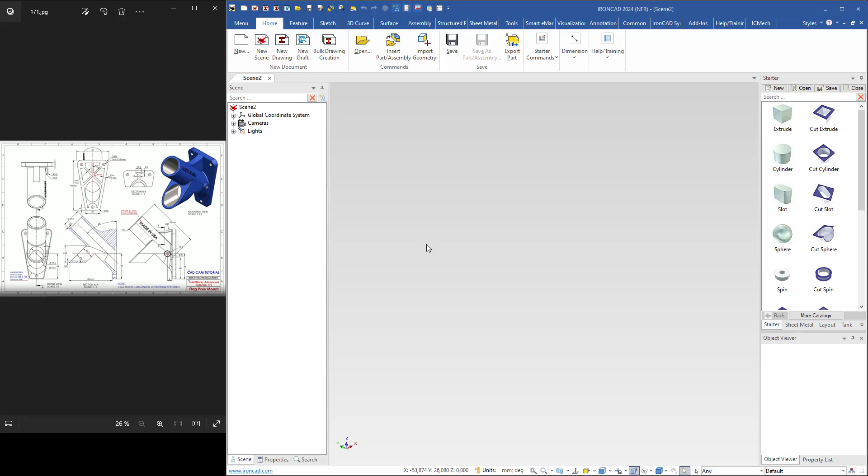In this video I'm going to create this flagpole mount. It looks like this, a drawing from a CAD/CAM tutorial. And I will begin with this backplate.

The size is 60, 95 and 27, and the thickness is 8. So I will begin to drag an extrude shape and drop it here in the scene.

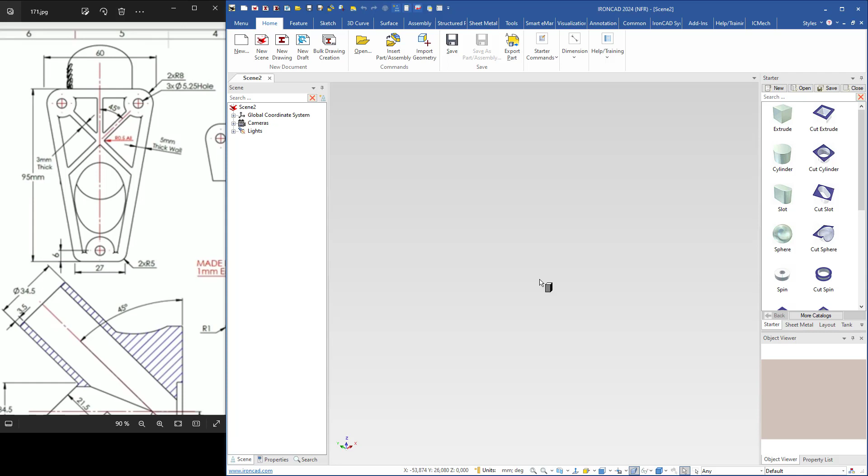Then I go to IntelliShape level and right click, go to Edit Cross Section. Usually it's display all, but I will go to hide all. Then I use the W key to activate the look at command. You have it down here as well.

I click here, then I select this line. Then I double click this dimension. Here I type 95 and hit enter.

Then I drag this line to the Y axis, so it will be positioned in the center.

Then I select that line and double click this dimension and uncheck maintain end conditions. Here I type 27 divided by 2.

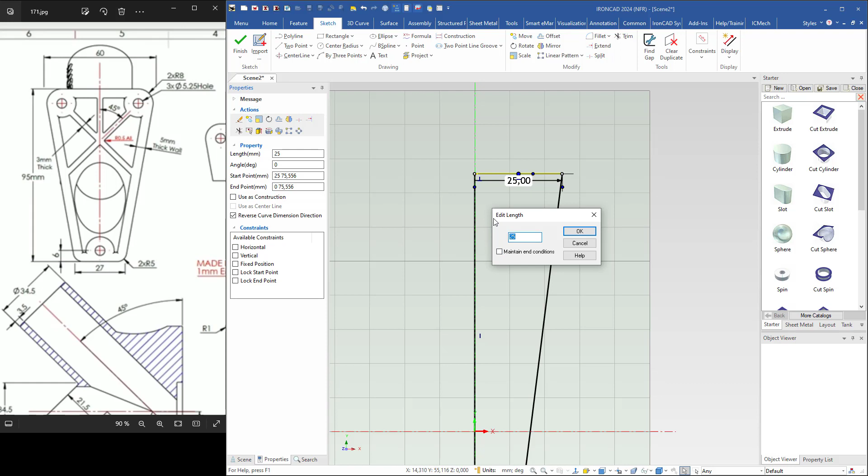Then I come up here, select that line, double click the dimension, uncheck that. That box here will be 30, like so, and then I select that line and delete it.

Select all lines, then I choose mirror, select the Y axis and click OK. Then I click finish up here.

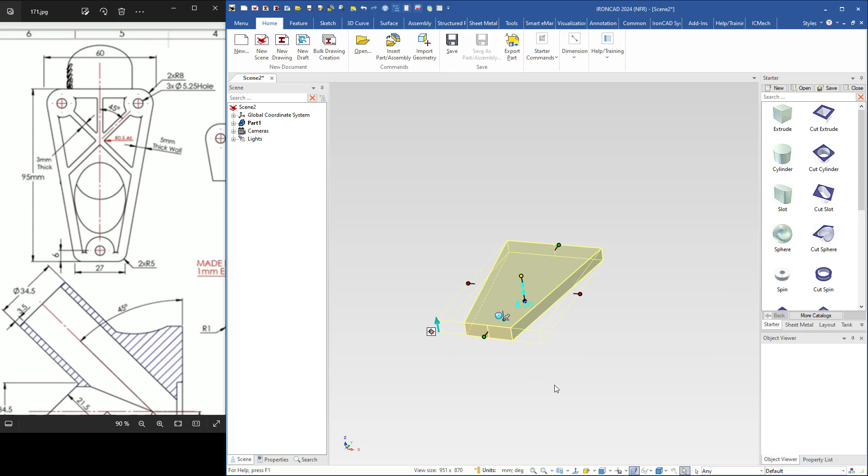And the thickness of this one is 8. Then I select it in part level, turn on the triball to rotate it in this direction 90 degrees.

And then I will blend these edges. The radius is 8 up here and 5 down here.

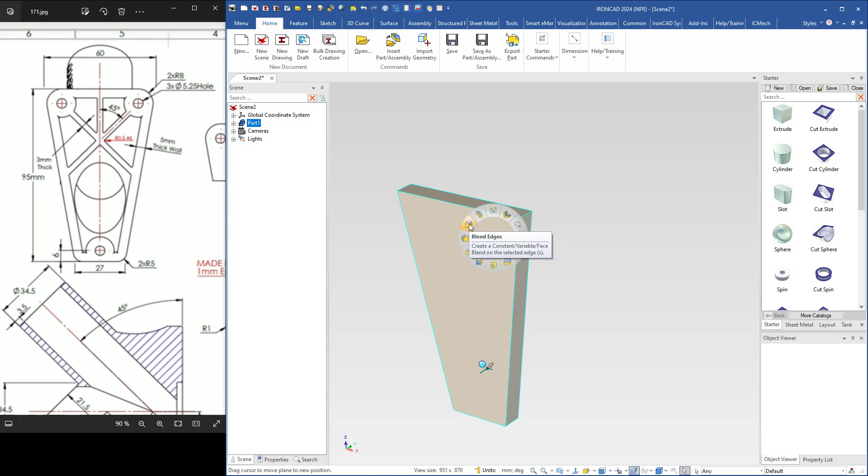So I press the S key on the keyboard and select blend edges. Select that edge, here I type 8, hit enter, do the same there.

And here I select that edge, and here I type 5 and hit enter, and do the same on this edge here. Let's see now, like so, and hit enter.

Then I will cut some holes. These 3, the diameter is 5.25, and I will grab...

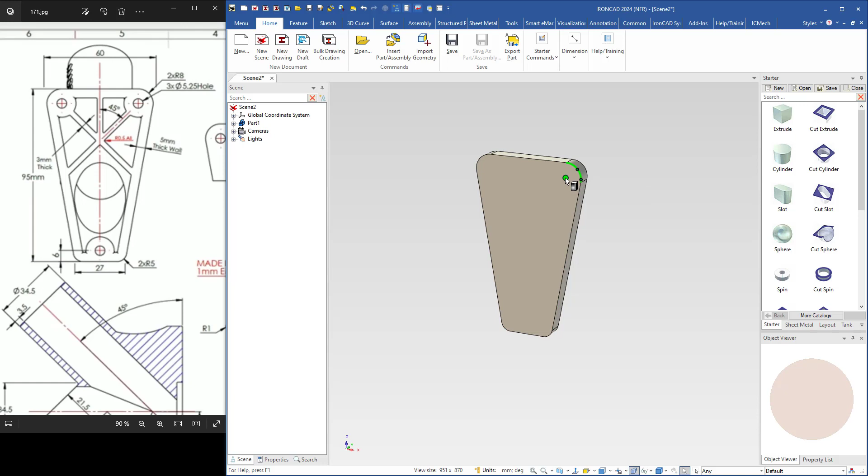...a cut cylinder, drop it here on the center point, change the diameter to 5.25, and then I grab this handle and snap it to the bottom, turn on the triball, then I right click...

...and drag the center handle, use the shift key to snap to this arc here so that the hole and the triball will be positioned on the center point of the arc, and drop it there.

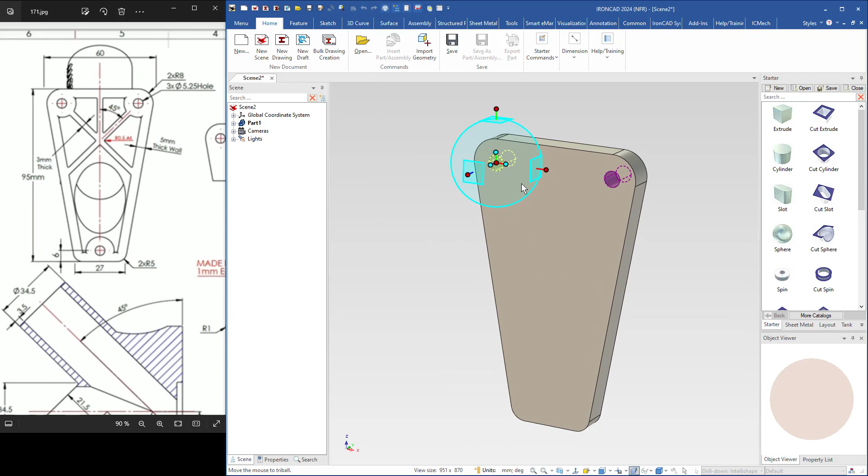Click link, and reset triball is also checked, because when I click OK, the triball will be positioned in the center of that copy. Then I right click and drag, and I will drop the hole here on the midpoint.

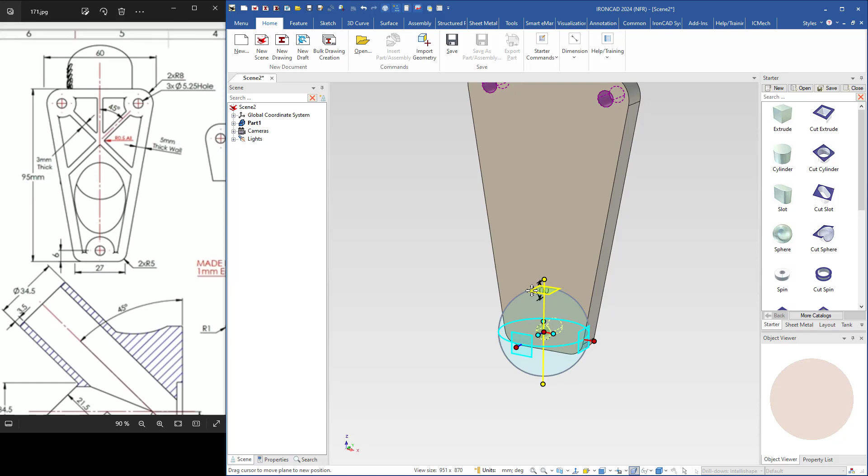Click link, and I will move the hole up 6 millimeters, like so, and then turn off the triball.

The next step will be to use shell feature on this side. So I will go to feature. You'll find it here as well, but for me with this small window it's easier to go to feature.

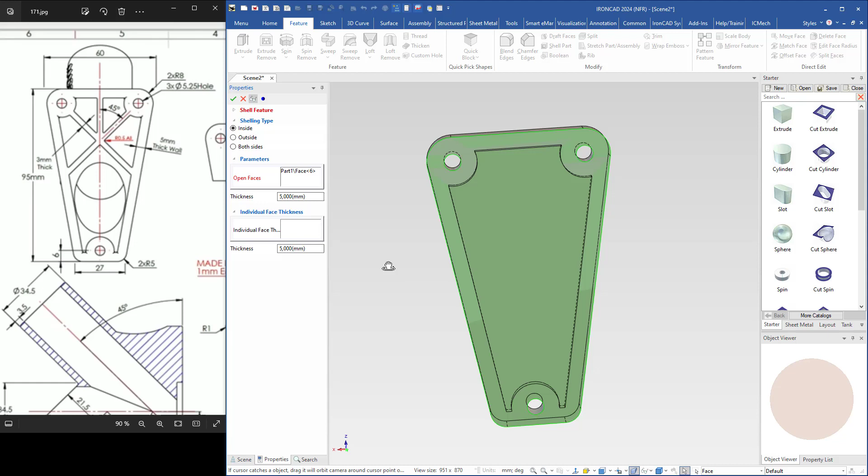So I will select shell part, select this face, and the wall thickness is 5 millimeters. We have it here, and I can also click the preview button to see how it will look like, and I'm satisfied, so I click OK.

Then we need some ribs here, and I will use the rib feature to do that. But first I have to add a sketch to tell the feature where to put the ribs.

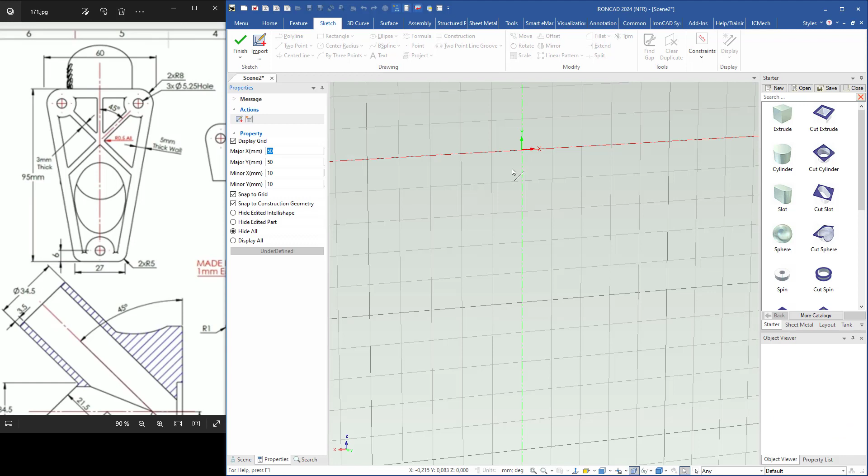So I use the sketch command here, a 2D shape, and I click here on the midpoint, then display all. Then I right click, choose 2-point line, and I will click here on the center point and drag a line like so. Do the same on this side.

And then I press escape. I will draw only 2 lines, because if I draw a line for that rib here, that rib will go through the whole part. So I begin with creating 2 ribs.

But first I have to change the angle of this line. So I click here on this side of the midpoint, double click the dimension, minus 135.

Click on this line, or this line here. That will be minus 45. Then I click finish. Now I can use the rib feature up here.

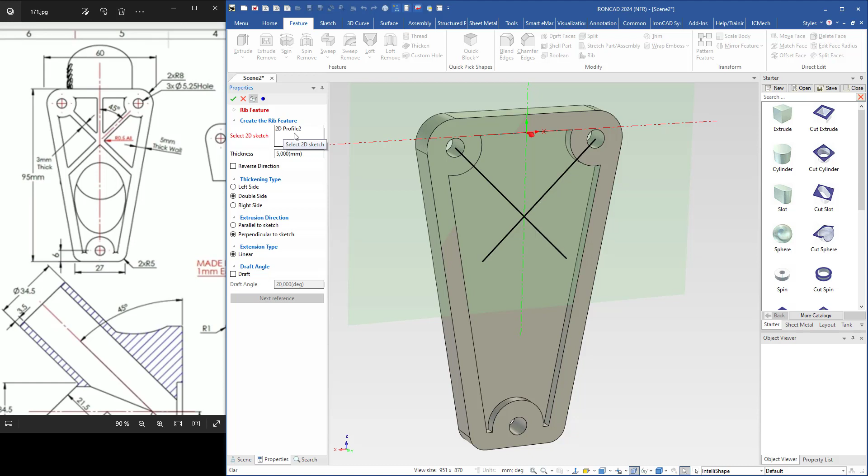Select the part, and the profile is already selected, but we see that this red arrow is pointing in this direction, so I have to check reverse direction.

And the thickness of the ribs are 3 millimeters, so I change that here. Then click OK, like so.

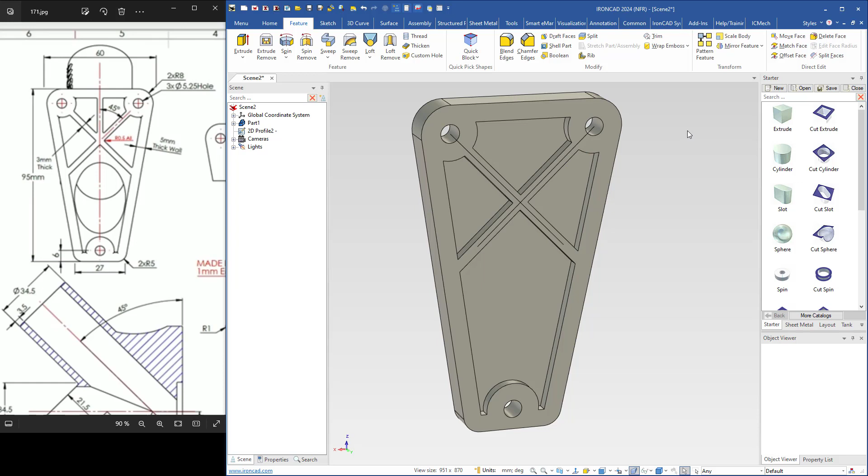Now I will create this rib. I will use an extrude shape to do that, so I drag an extrude shape, drop it here on the center point or midpoint. Then I right click and push this handle to change in both directions.

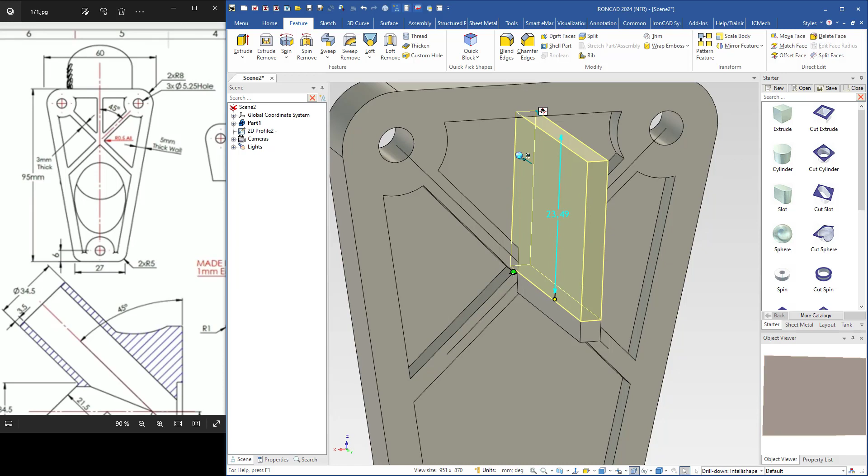Drop it there, type 3 and hit enter. Then I grab this handle, snap it to this edge, and I grab this handle to snap to this intersection here. And then the height handle and snap it to this side. So now we have the ribs in place.

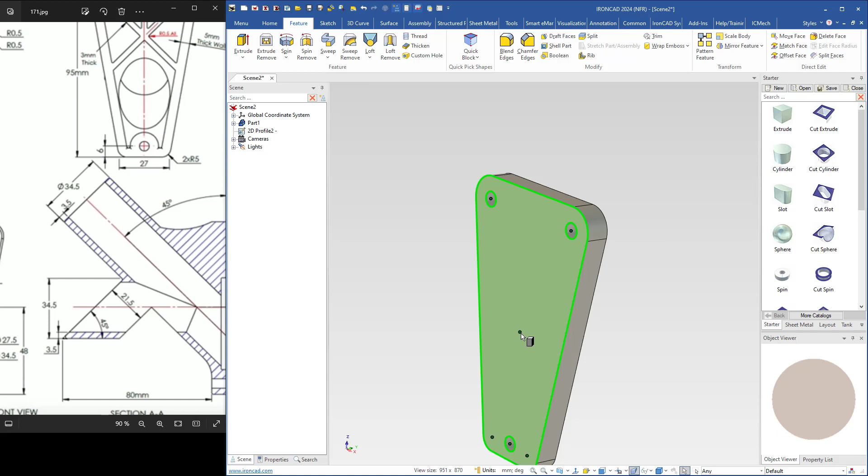Next step is to add this cylinder. The length of the cylinder is 95 and the diameter is 34.5. So I will drag the cylinder, drop it here on this point, change the diameter to 34.5, the length to 95,

and the height, or the center of that cylinder, is 40 millimeters from the bottom. So I will use the tri-ball. Let's see now. I will do like this. Turn on the tri-ball, right click, and edit distance from point, the bottom, that's 40, and hit enter.

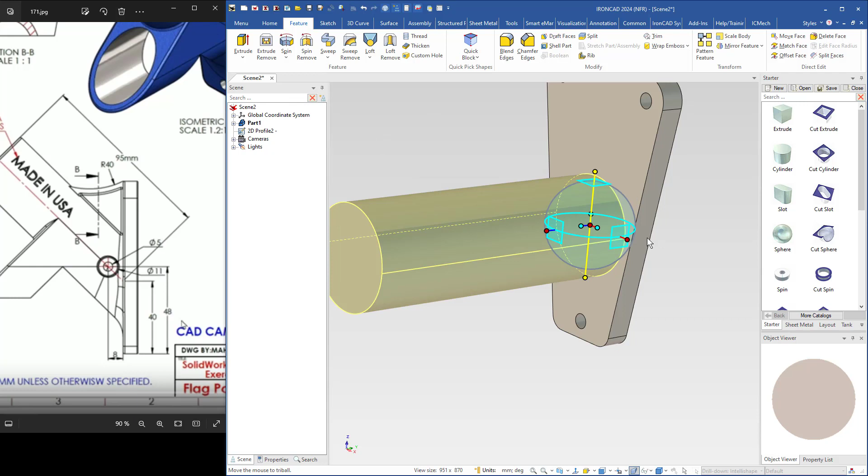Now I can rotate it 45 degrees, like so, 45. And then this side should be attached to the back plate. I will remove the tri-ball. And to do that I will grab this handle and move it up a bit.

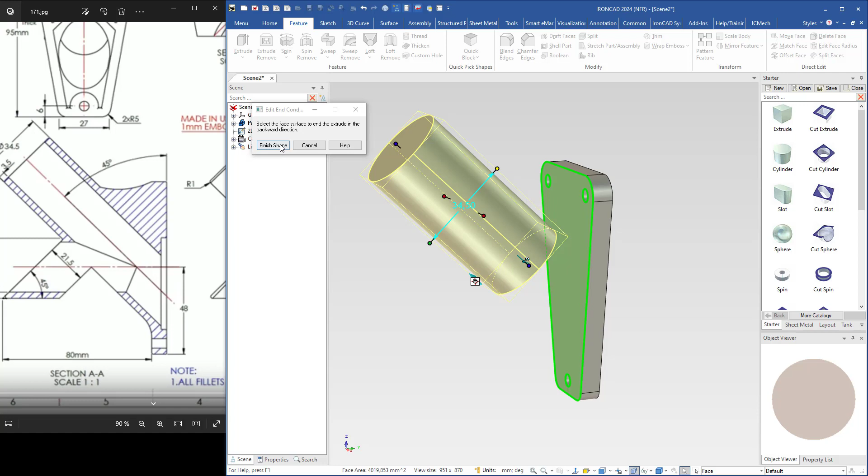Then I right click the feature and choose backward end condition. We see that we have 3 options here. I will choose the extrude to surface. Select that surface and click here finish shape. So it will look like that.

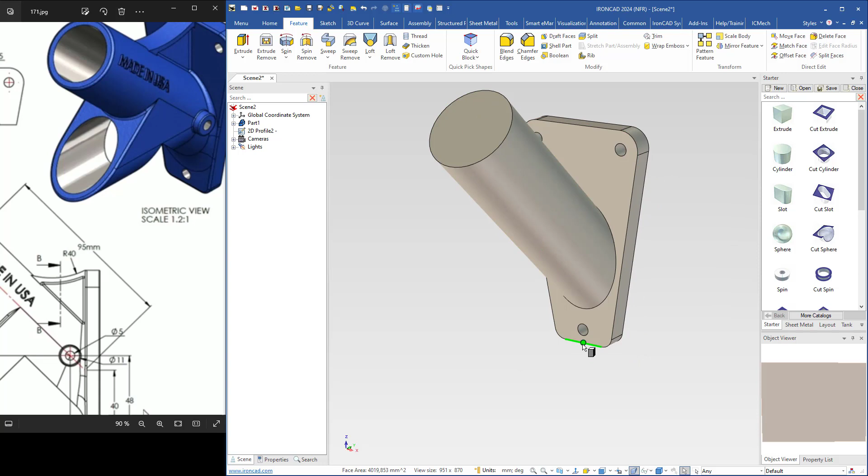And next I will create this part, this one, and I will use an extrude shape to do that. So I grab an extrude shape, drop it here on the midpoint, and the width of that shape should be the same as the tube or the cylinder. That's 34.5. So I will right click and push, type 34.5, and the length of it is 80 from the back plate. So I click on this handle, type 80 and hit enter.

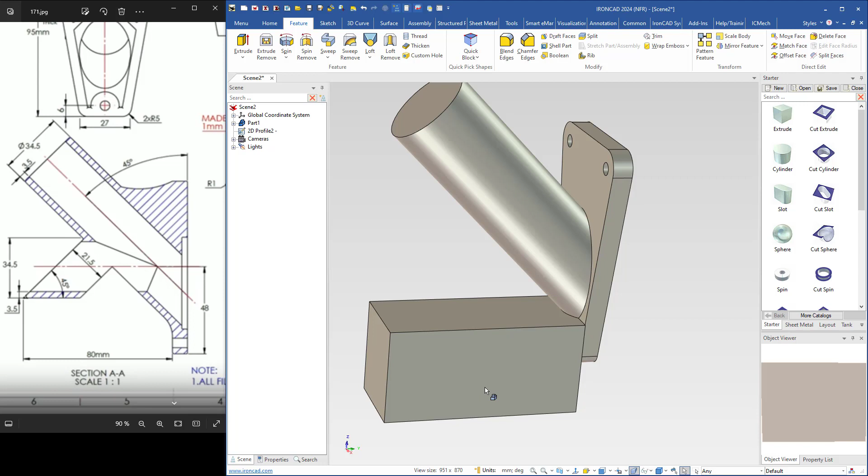Then I will add 2 blends. Select this edge, grab this handle and snap it to the midpoint here. Then I click on the other side. Click OK. Then I have to move this part up a bit.

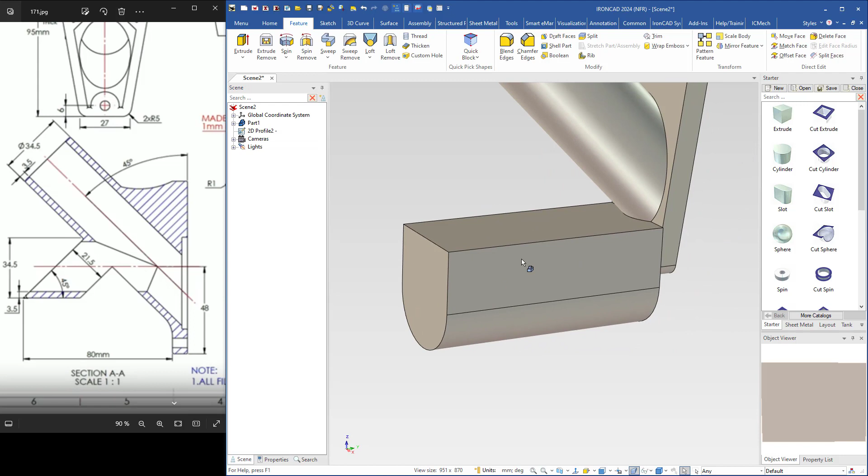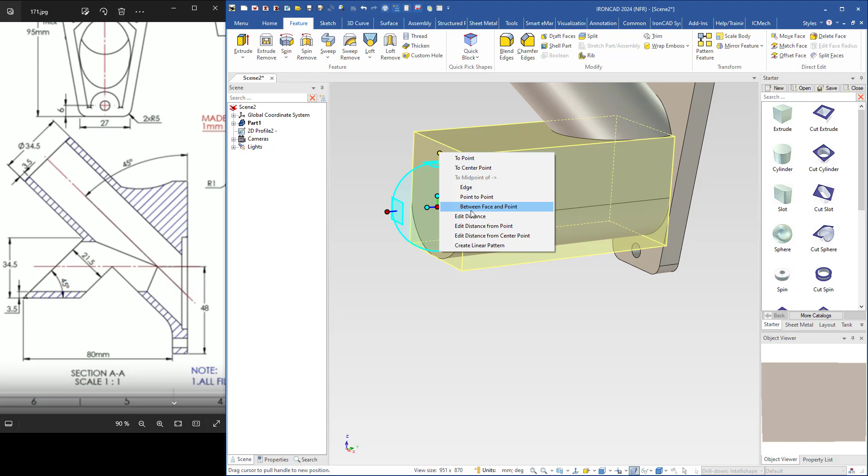So I select it in IntelliShape level, turn on the tri-ball, and then I will move the tri-ball and right click the center handle and place it to the center point of this blend. Lock the tri-ball, and the center of this part should be 48 from the bottom. So I right click this handle here, edit distance from point, the bottom, that's 48, like so.

And we see that this part should be attached to the cylinder. So I will grab this handle and drag it a bit. Then I right click the IntelliShape, and here we have backward end condition. We have three options here, and in this case next will work, extrude to next.

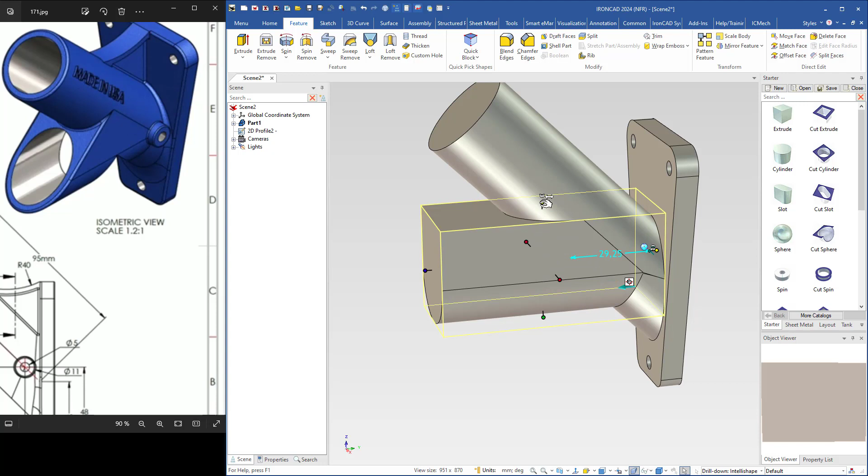And that's one here. I click OK. Now we see that this end will go to the backplate, but if I grab this handle and drag it to this position, it will snap to the cylinder. So now we have it in right position. Drag this up a bit.

Then I will remove some material, 45 degrees here. We see the angle here. To do that, I will use draft faces.

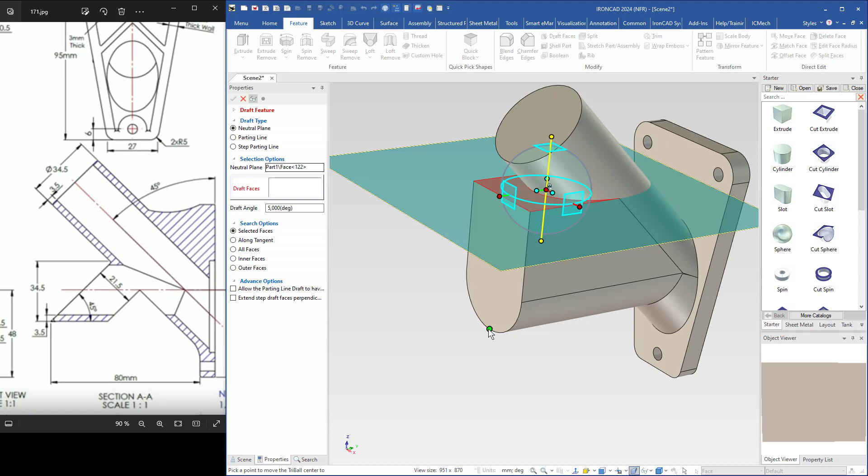So first select neutral plane, that will be this plane on this side, but I have to move it, so I will use the TriBall. Right click the handle, choose to point, and I will select this point like so, turn off the TriBall, then draft faces will be this face and 45 degrees. Then I click OK. Now I have removed that material.

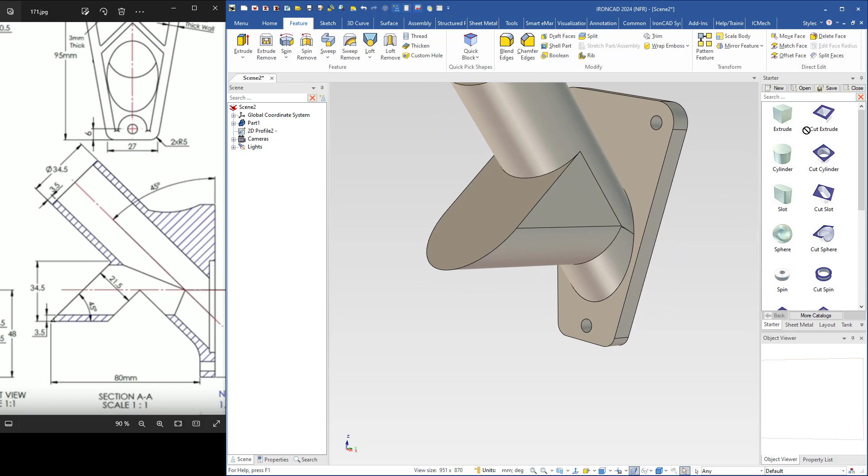Then I have to cut some material here. I will use a cut extrude, drop it here. I will do like this, grab that handle, move it about forward a bit. Then I use the TriBall, select this axis, rotate it in this direction, 45.

And we see that the thickness is 21.5, so I will right click this height handle, edit distance from this point, 21.5.

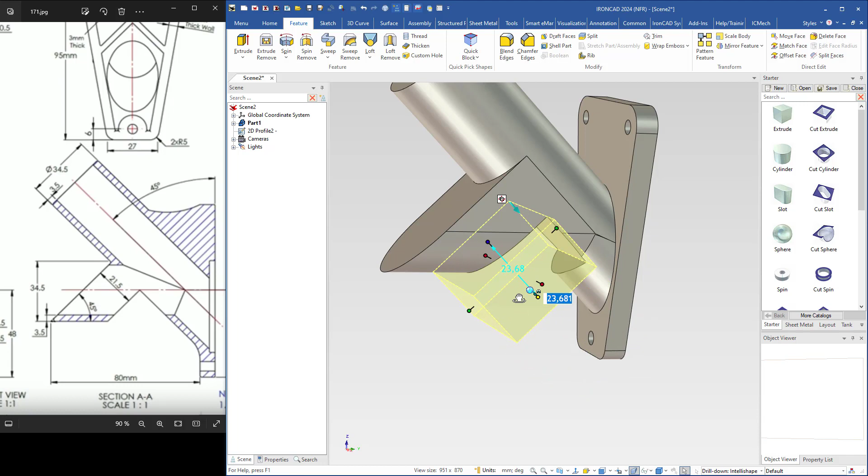Then I will grab this handle to adjust the length a bit, and this one as well. Then I right click this handle, select to point, and it will be moved to this point here. Let's see now, like so.

So this will be the end of the first video. I will continue in the next video.